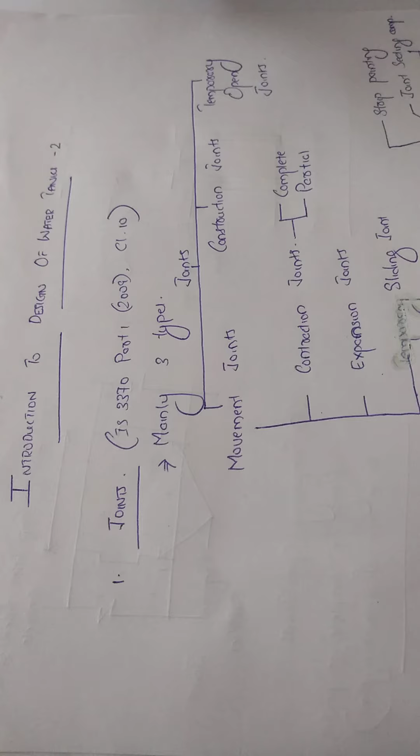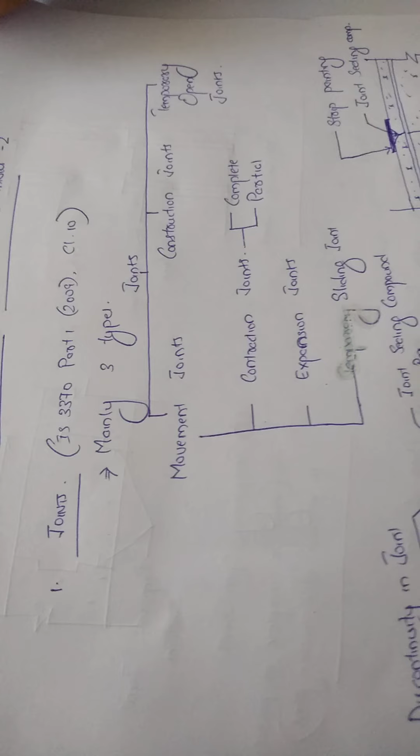So in this video we will be continuing with our introduction to design of water tanks. Here we are going to discuss regarding joints. The IS 3370 Part 1 2009 Clause 10 gives the detail regarding the various types of joints that we are using in our water tank.

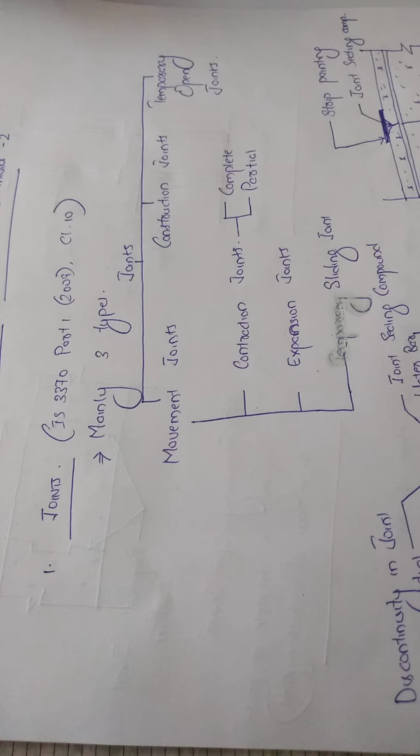So the first one is movement joint. Second one is construction joint, and third one is temporary open joints. The movement joints again can be classified as contraction joints, expansion joints, or sliding joints. The contraction joints can be either complete contraction joints or partial contraction joints.

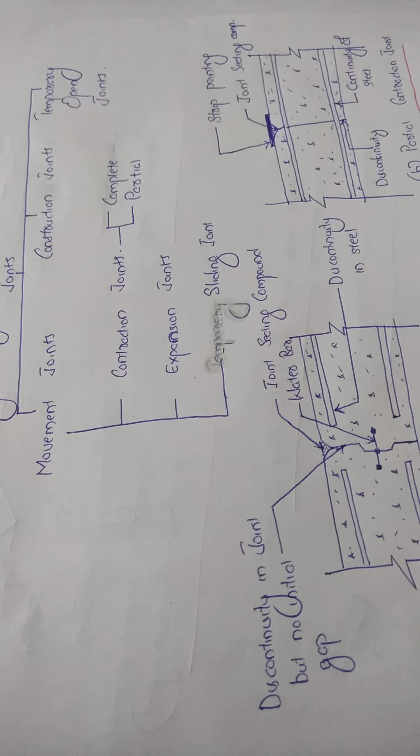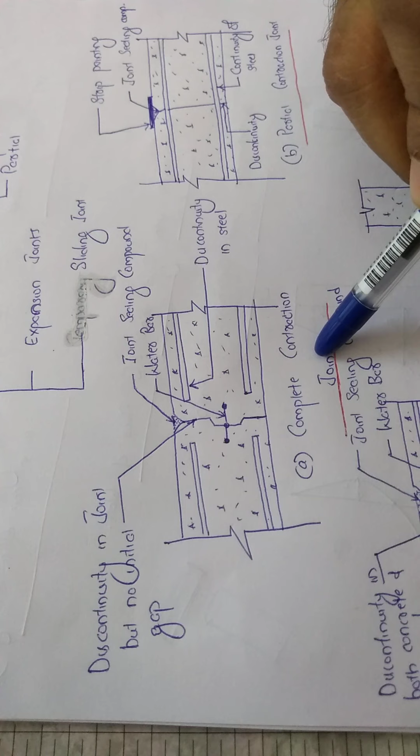So these are the figures. The first one is the complete contraction joint. What is complete contraction joint? This joint is a flexible joint. Here the left and the right portion is discontinued. Both the concrete as well as the steel are discontinued. But here there is no initial gap, no gap between the left and right portion. But there is a discontinuity.

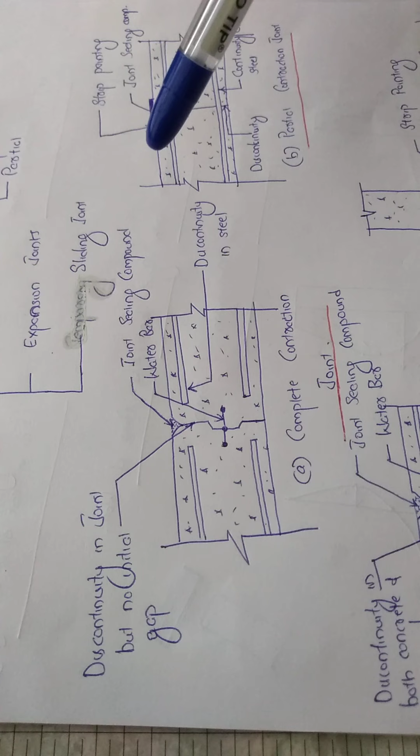In order to prevent seepage of water through this discontinuity that we have generated, we are using joint sealing compounds and water bars. This can be also called as water stops, which is a flexible tape-like element or material in order to prevent seepage of water. In case of walls, it is provided at the midpoint, and in case of slabs, floor slabs, we are providing at the soffit of the slab.

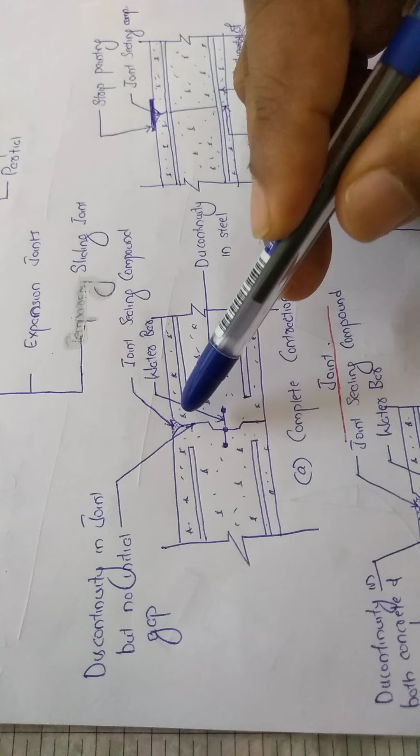And in order to take the shear stress, we can give a shear element also, or a shear key. The second type is a partial contraction joint. The name itself indicates it is partial.

What is partial here? It is the continuity in steel reinforcement. Here, the left and right portion, there is a discontinuity in concrete, but the steel reinforcement is continuous. And in order to prevent seepage, we are providing joint seal compound and also strip painting here. This is without any shear.

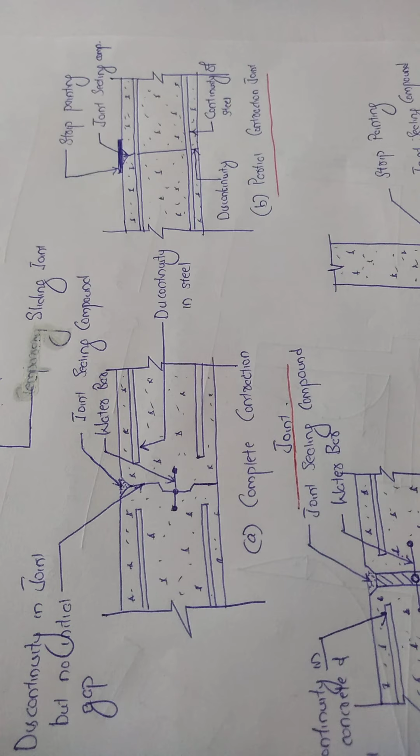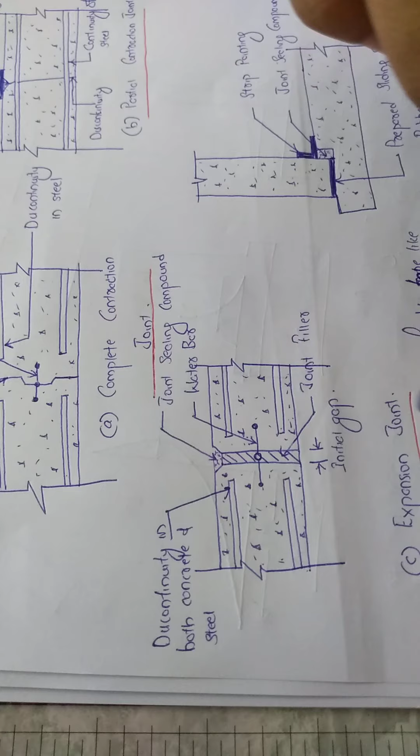In case of expansion joint, the difference here is we are providing an initial gap. There is a gap between the left and right portion. Here also there is a complete discontinuity in concrete as well as steel. In order to prevent the seepage of water through the joint, we are providing joint sealing compound or strip painting, etc. Also, we are providing a water bar in between, as we have discussed earlier. The gap in between, this initial gap, is filled by some filler materials that is being shown over here.

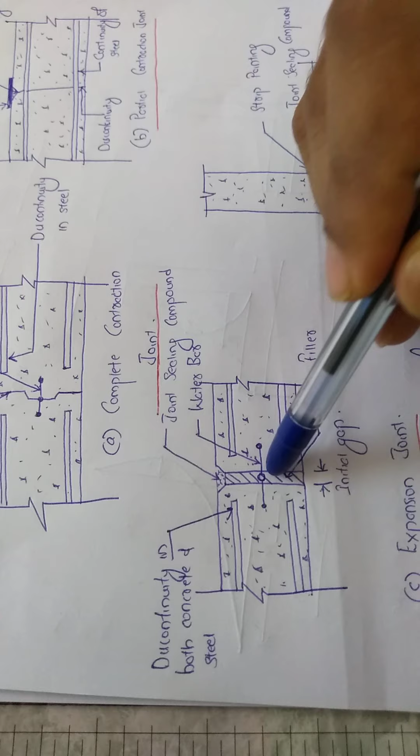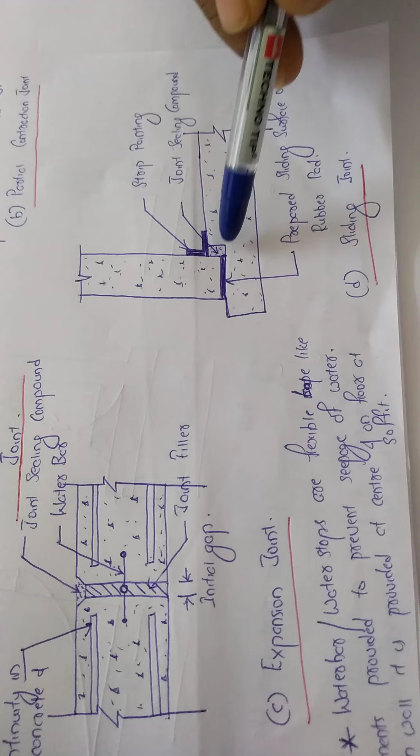The fourth type is the sliding joint, or the third case of a movement joint. This sliding joint is shown over here. This sliding joint is normally provided in between the wall and floor. Here you can provide a joint sealing compound. You can see a strip painting, and also the prepared surface, sliding surface, or a rubber pad is used for the flexible joint.

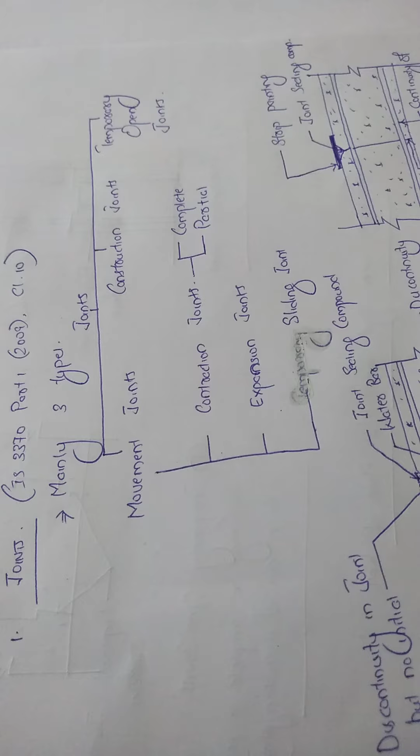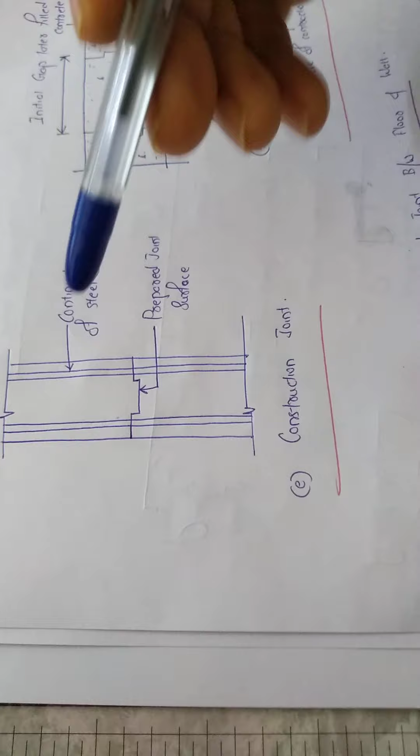The second type of joint is the construction joint. Where is it used? This construction joint is introduced for the convenience in construction. Suppose we are not in a position to complete the entire work in a single stretch, we need to use this construction joint. There, the top or bottom, in case of a wall, or a left and right portion in case of slab.

These are discontinued, but the surface is prepared such that there is a perfect continuity between the sections. Also in the design we are assuming that there is perfect continuity, so we have to make sure that in practice also there is perfect continuity between the sections.

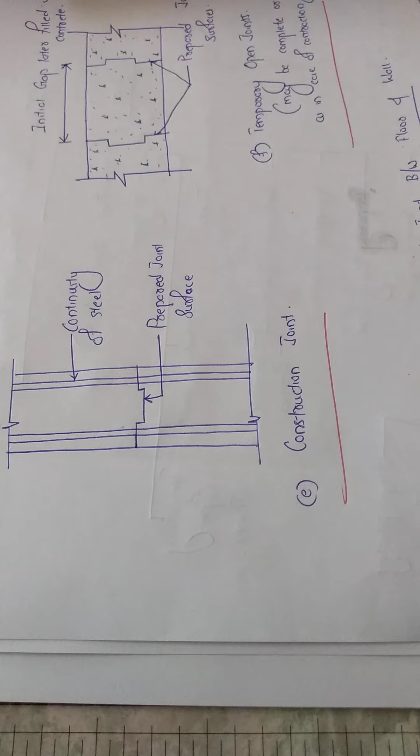The third type of joint is the temporary open joints. The temporary open joints you can see in all these bridge constructions. This can be complete or partial, as in case of the contraction joint. The difference of this particular temporary open joint compared to our contraction joint is that we are having an initial gap which is later filled with concrete. This is the only difference with this when compared to contraction joint.

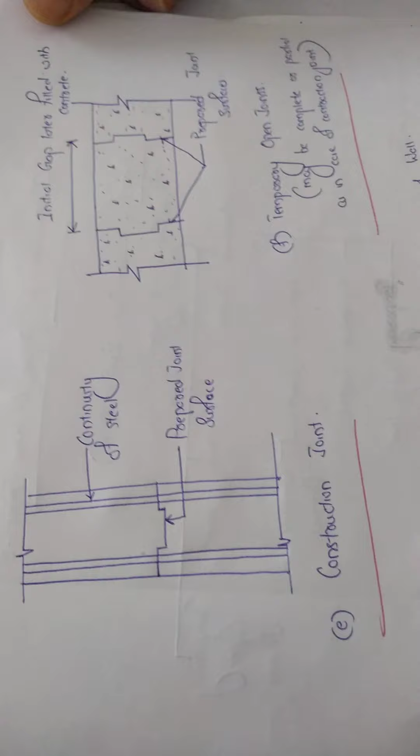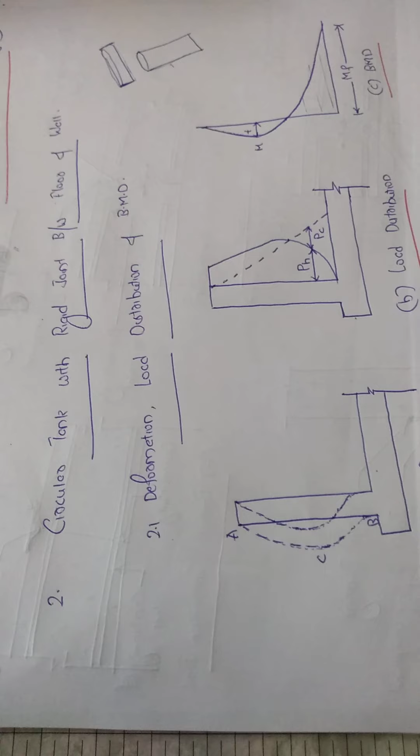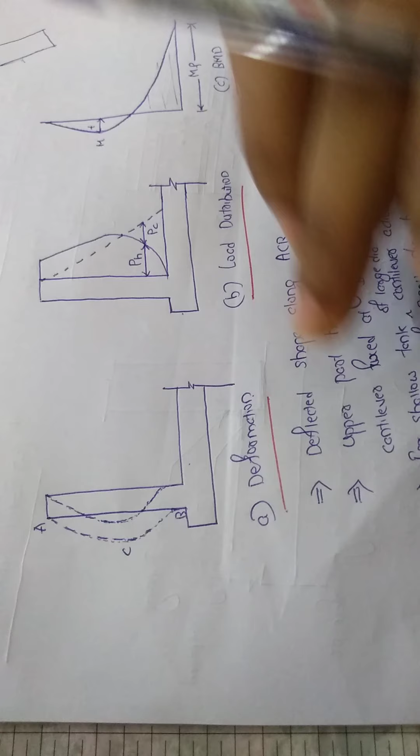The second topic that we are going to discuss in this video is the behavior of circular tank with rigid joint between floor and wall. We have discussed this in the previous video also, but we will be discussing more in detail here. So here the wall and the slab is made monolithic, or it is fixed at the junction B.

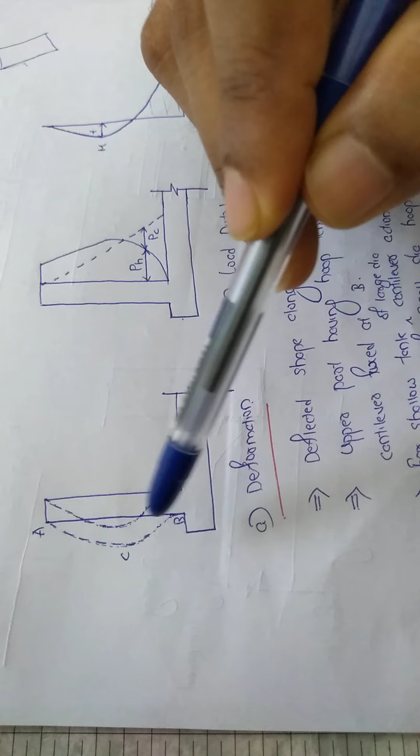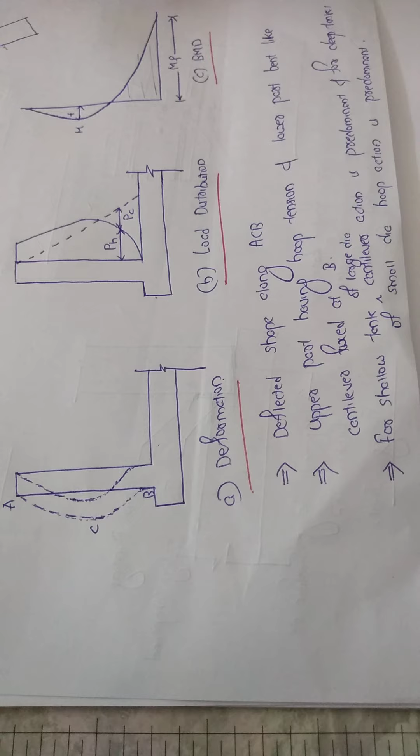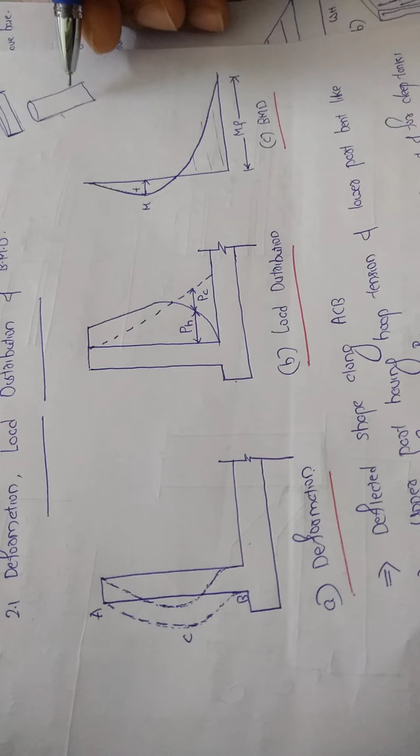The deflected shape of this tank wall is shown by ACB. The upper part of this tank will be subjected to hoop tension and the lower part will be subjected to cantilever bending. For shallow tanks of large diameter, as in this figure, the cantilever action will be more predominant. In the case of deep tank with small diameter, as in this figure, the hoop action will be predominant.

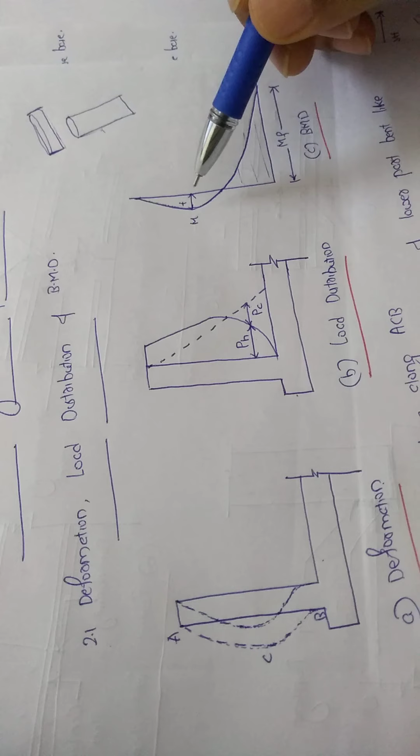This is the hoop load distribution as well as the hydrostatic distribution. We will be having the hoop action as well as the cantilever action. This figure shows the bending moment diagram. At the base you are having the maximum moment, which is negative, or you can have a tension at the inner side, and you can have the moment positive moment M in between, near about the midpoint. You are having a positive moment also. So this is the bending moment diagram of such a type of tank.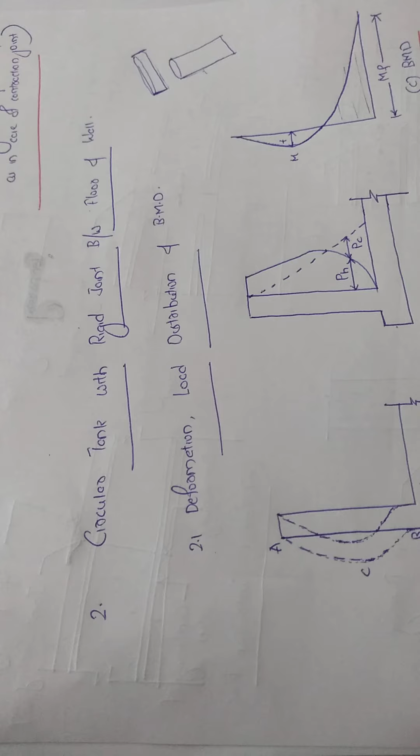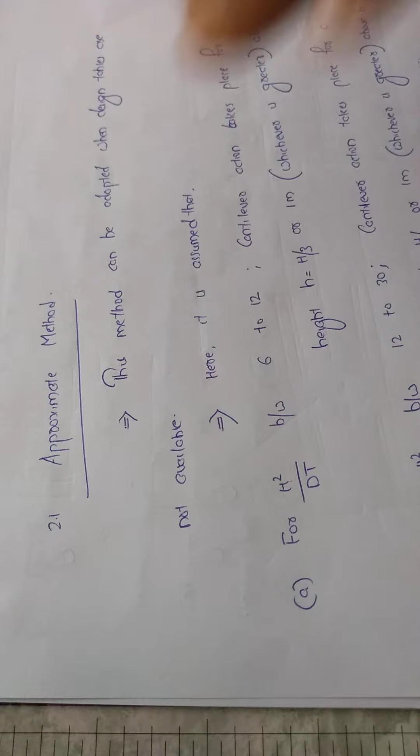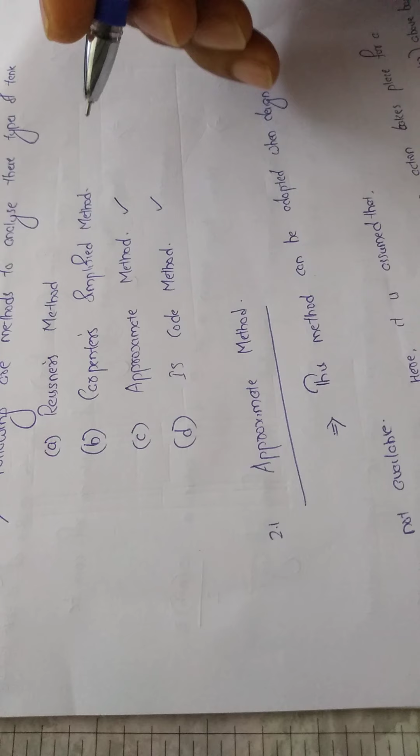So the analysis of these fixed tanks is quite difficult. These are some of the methods by which we can analyze these tanks. The first is Reissner's method, second is Carpenter's simplified method, third is Approximate method, and fourth is IS method.

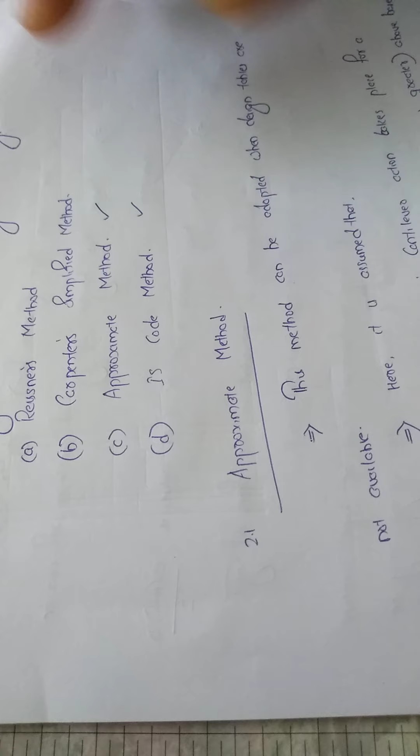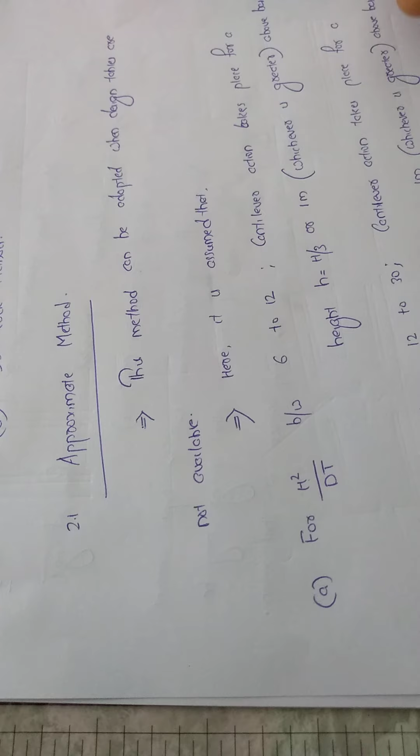We will be discussing the Approximate method in detail in this video, and we will solve one problem using the IS method in a different video. This method can be adopted when design tables are not available, for example if you don't have Reissner's table, or Carpenter's simplified table, or the design table as per IS 3370 part 4, then we can go for this approximate technique.

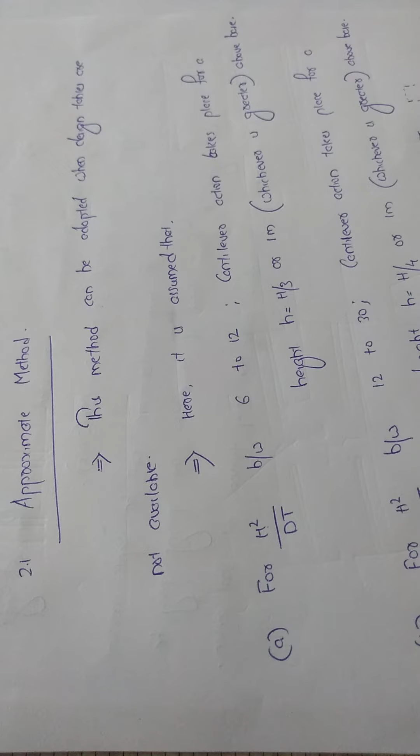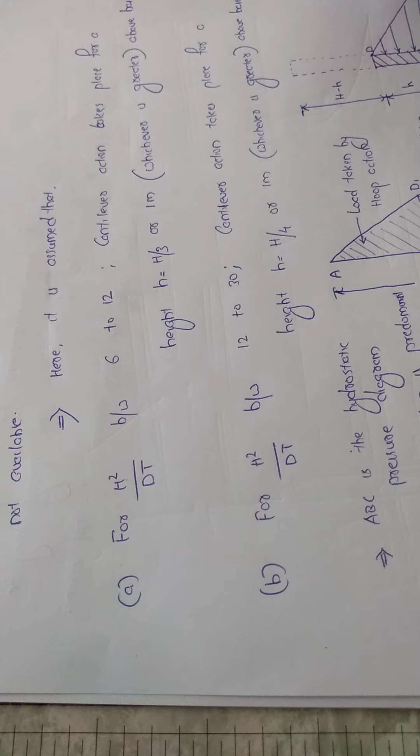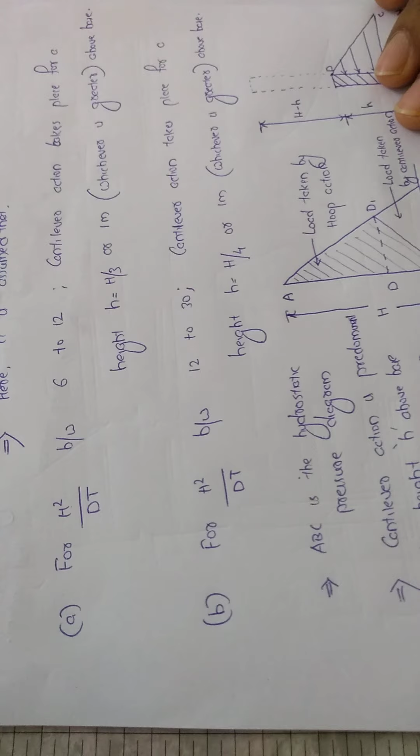Here it is assumed that for h squared by dt value, if it is varying between 6 and 12, the cantilever action will take place for a height h equal to H by 3 or 1 meter, whichever is maximum, from the base. When h squared by dt is between 12 and 30, the cantilever action will take place for a height h equal to H by 4 or 1 meter, whichever is maximum, from the base. The figure shows the hydrostatic pressure distribution A, B, C.

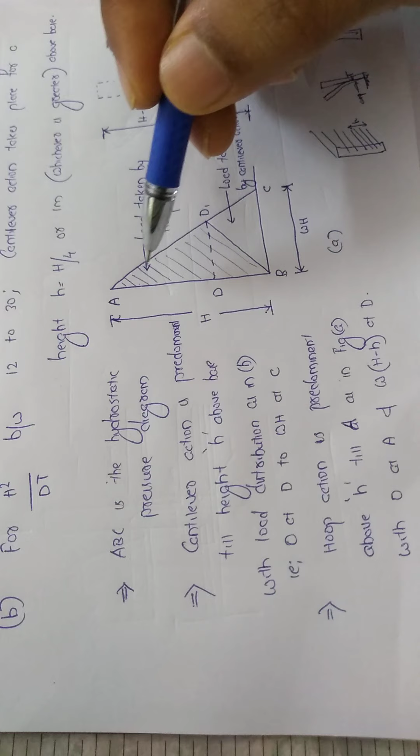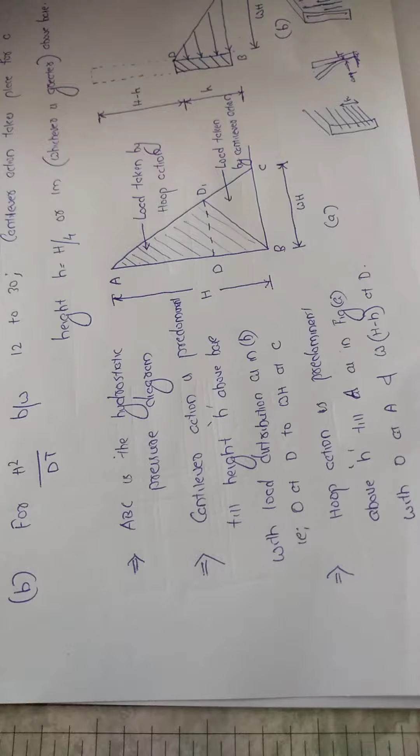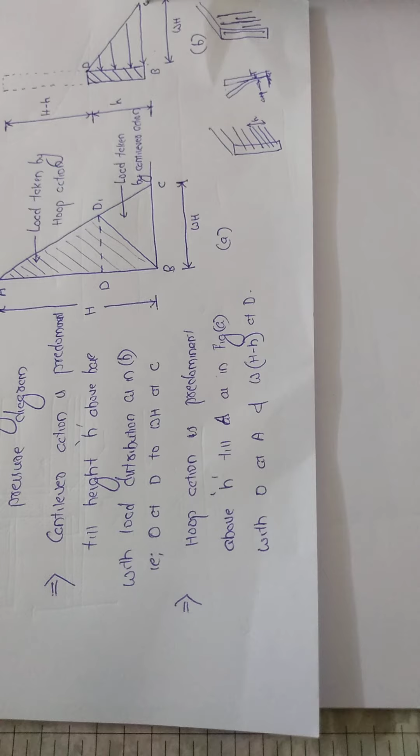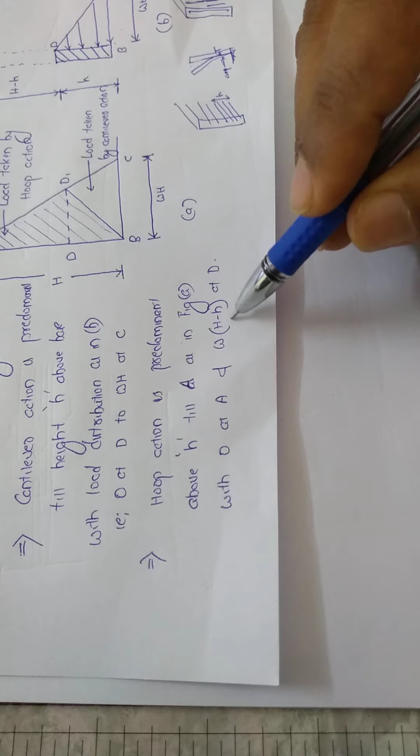The load taken by hoop action is up to the D1 portion, A, B, D1, and B, D1, C is the load taken by cantilever action. The cantilever action is predominant till height h from the base, with the load distribution as 0 at D and WH at BC or at C, taken from the load distribution diagram. The hoop action is predominant with maximum at D1, equal to W into H minus H at D1, and 0 at A.

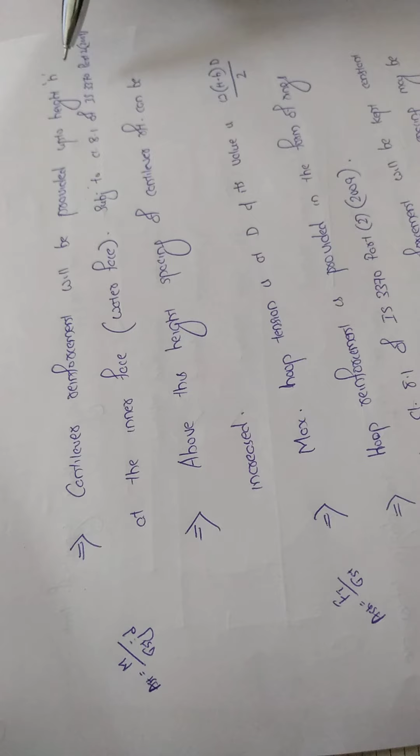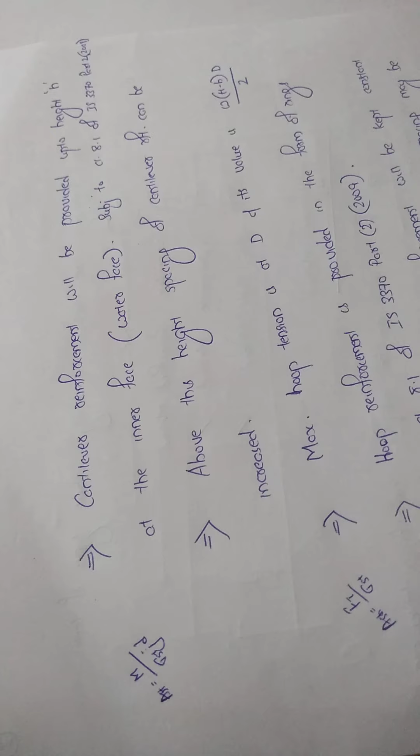The cantilever reinforcement is provided up to height h at the inner face or water face, using clause 8.1 of IS 3370 part 2 2009 for the reinforcement details. The cantilever action is by bending, so the reinforcement is found by the formula M by sigma-st-j-d, which we discussed in the previous video.

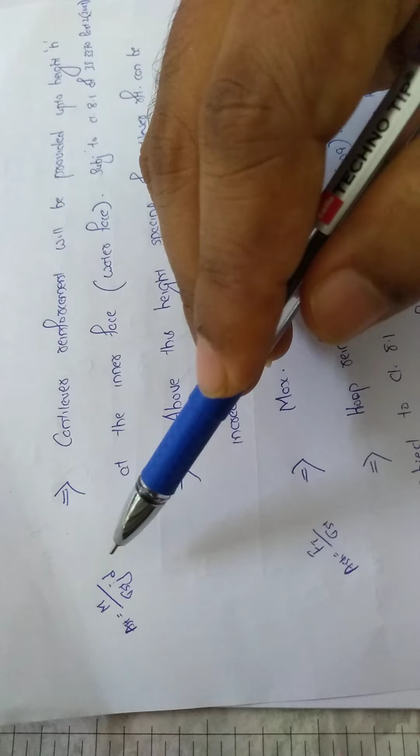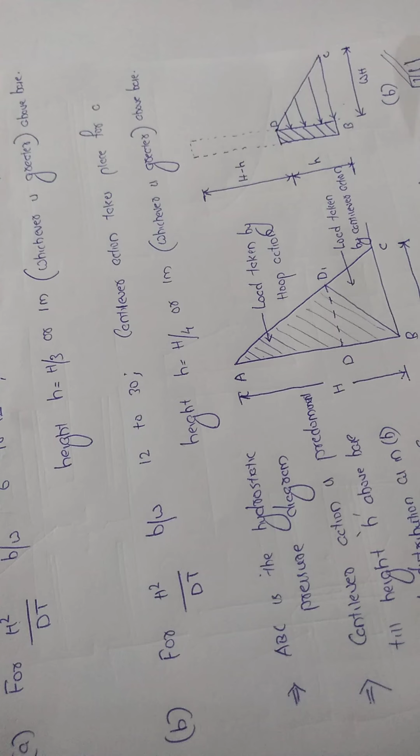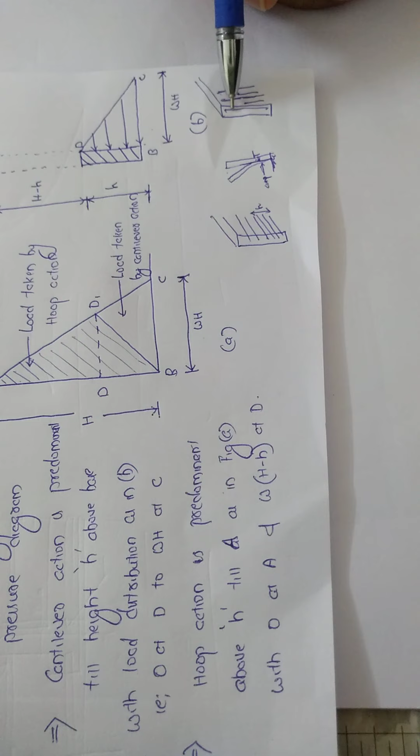Above this height, spacing of cantilever reinforcement can be increased, because above height h the hoop action becomes predominant while cantilever action is predominant below it, so maximum reinforcement occurs up to this height. In the section, cantilever action is predominant in the bottom portion, so we give closer reinforcement there, and towards the upper portion the spacing between reinforcement can be increased, with minimum spacing at the bottom since cantilever action is maximum there.

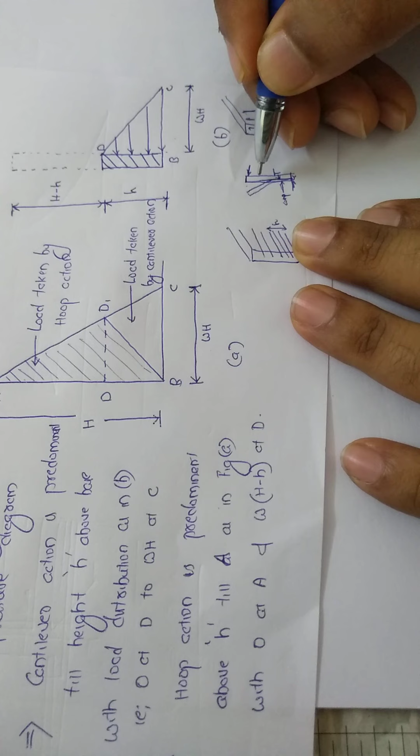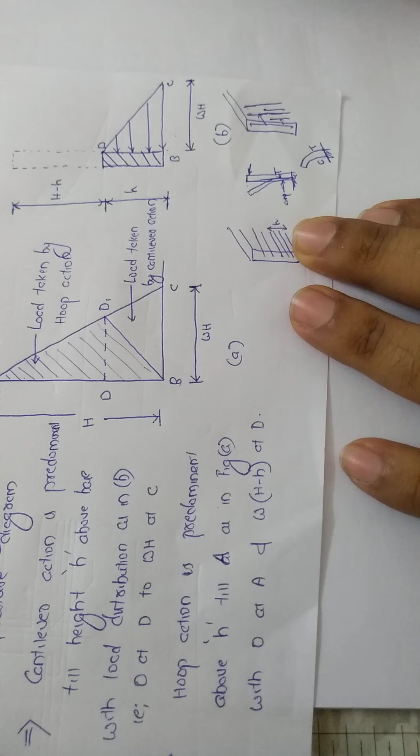Also, if this is the wall and the load is coming towards this direction, the wall will bend like this, so the inside portion will be subjected to tension and the outside portion to compression. That is why we provide reinforcement at the inner face or the water face.

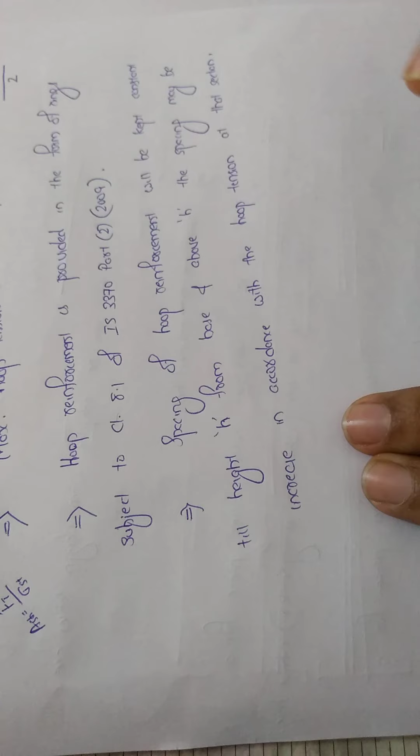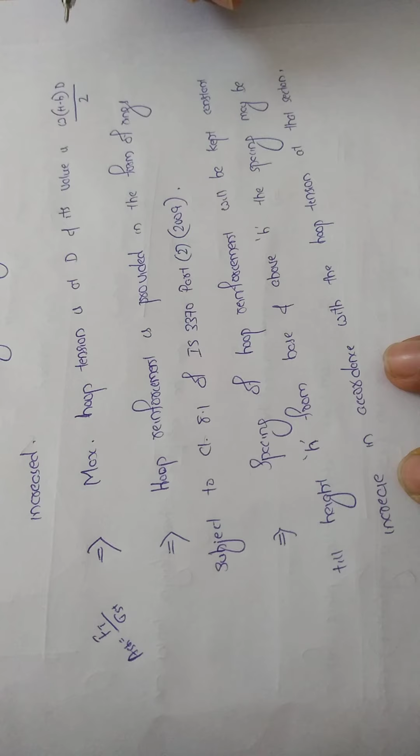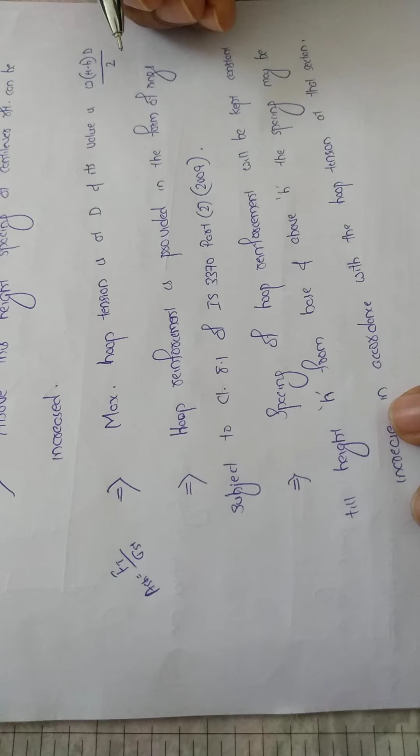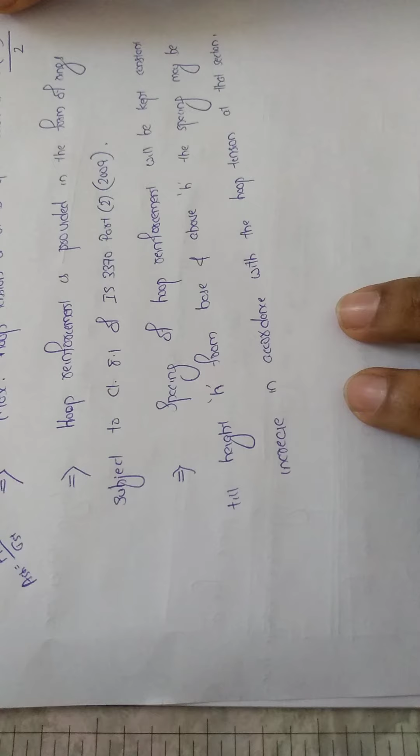The next reinforcement to provide is the hoop reinforcement. The maximum hoop tension occurs at D, with value W into H minus H into D by 2. This is direct tension, and we use the formula Ft by sigma-st, which we also saw in the previous video. The hoop reinforcement is provided in the form of rings, again subject to the reinforcement details discussed in IS 3370 part 2 clause 8.1.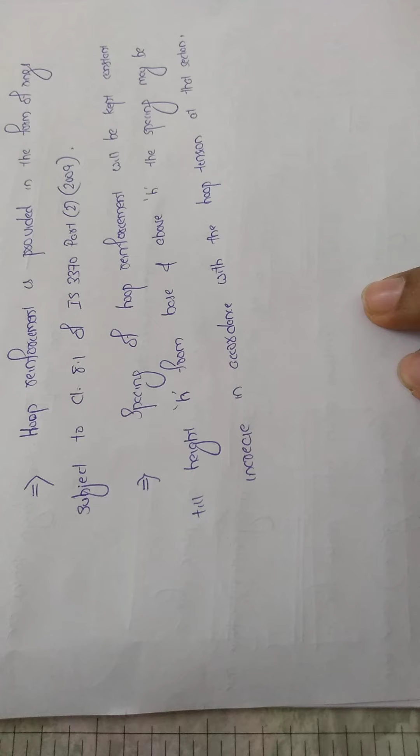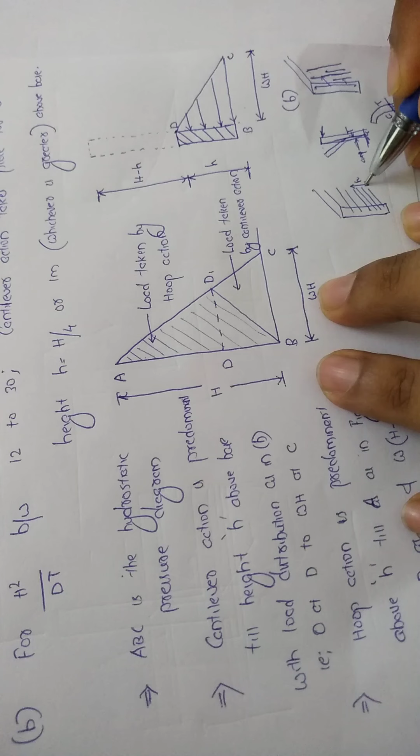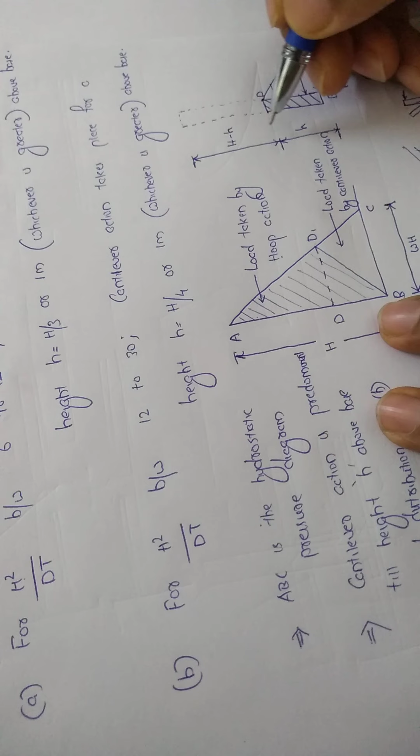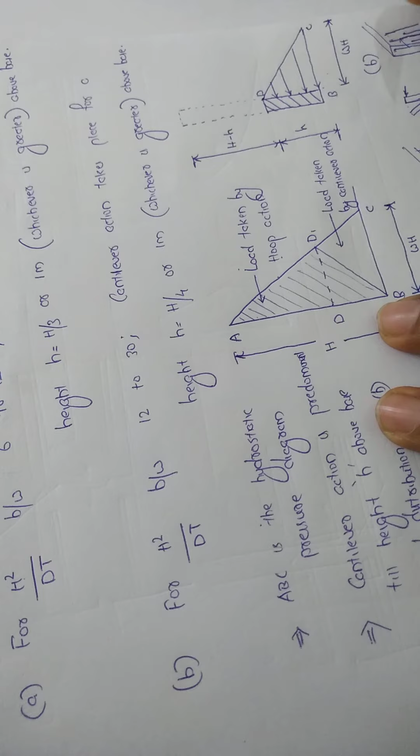The spacing of reinforcement is kept constant till a height h from the base, and above h the spacing may be increased in accordance with the hoop tension at that section. So till this point we keep the hoop reinforcement at constant spacing as shown in this figure, and above this we can increase the spacing according to the hoop tension at that section. If we take a section at distance h dash, the hoop tension there will be W into H minus H dash into D by 2, and in accordance with that we can provide the reinforcement.

So this much was what we discussed in this video. Thank you.